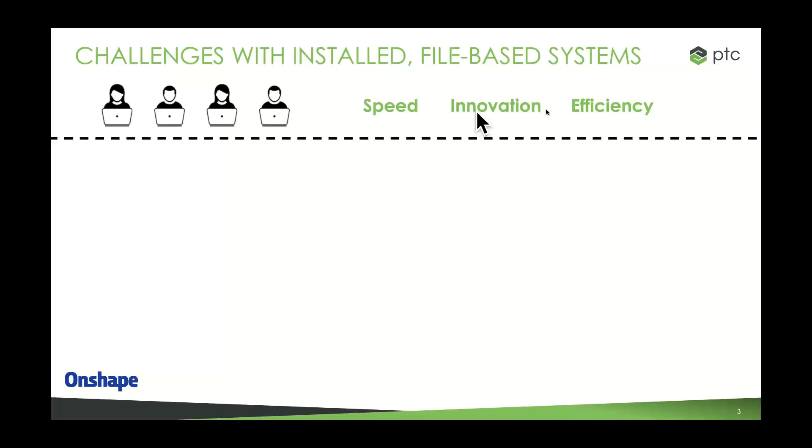But anytime you go below this dashed line that we've drawn here across the screen, that gets in the way of those 3 tenets at the top. So number 1 and 2, which I'll dive into in detail as we go through the presentation, is dealing with this installed software paradigm that we have currently with everything except Onshape. So yeah, you have CAD, PDM, I'll dive into this. Then we have the versions of the CAD that you have to worry about too. 2017, 2020, they're incompatible—you can't go open a 2020 file in 2017. And there's new versions every year. So it gets to be very unmanageable when you're dealing with your extended supply chain.

But the other things that get in the way are the actual files themselves. And this is something that you just wouldn't think about. Every day you go file open, browse for your files, C:\this, X:\that. You might have a PDM that you sign into and you check out a file.

All of these things are not helping you design. Of course, they're organizational things that need to be there for building your designs in a Windows file system usually. And anytime you work with a file, you're creating a file copy essentially.

Now you can work over the network, but that's usually not recommended because the files are big, packets get dropped, things like that. So what people usually do is they take a file, copy it to their desktop, work on it locally. It's faster that way.

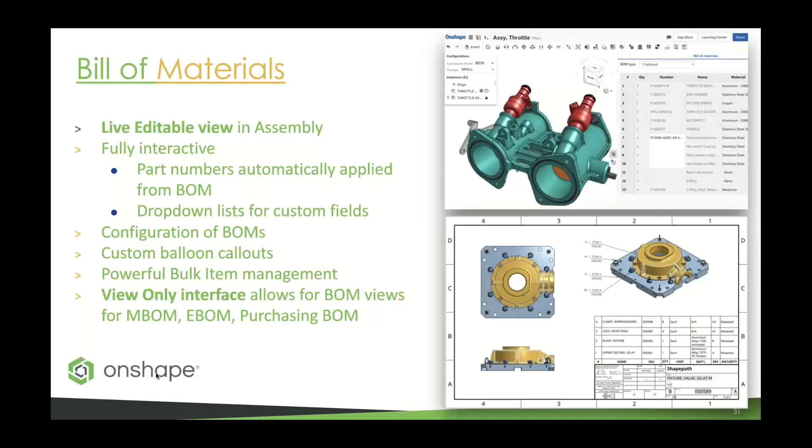But even with a PDM system, you're making file copies. Oh, let me just go back to the previous slide here. Sorry, just hit the wrong button. Slide back. There we are.

So I'll just catch ourselves up here. You have file servers, you have PDM systems that you install. By the way, PDM systems are big file copy machines, essentially. So every time you check out a file to work on it, it takes the file out, copies it. I'll get into detail on that in a few minutes.

I've implemented hundreds of PDM systems over the years. If you saw a photo of me, you've seen I'm quite bald now. I've lost all my hair from pulling it out, dealing with the issues of installed PDM.

People are more and more going to the cloud, right? And cloud drives, Google Drive, Dropbox, OneDrive from Microsoft. But even those are creating file copies between the cloud and your local file system on your computer. You're never working on the cloud, even though you think you are. It's copying a file down to your desktop and trying to synchronize it at a certain polling sequence.

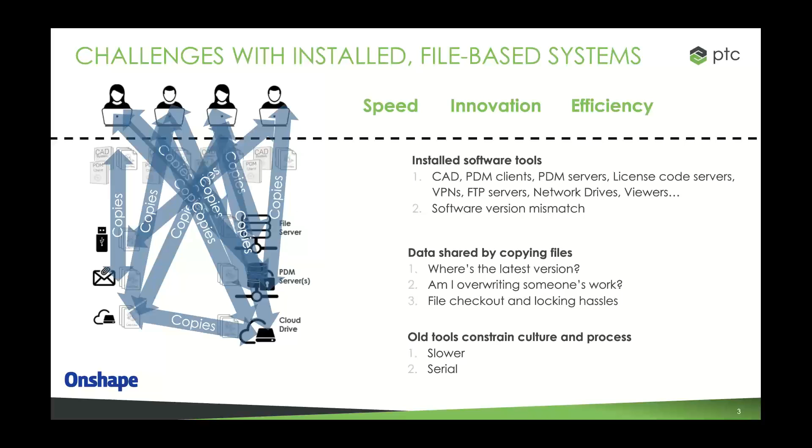So this also gives you two other issues: it's a slow and serial process, and only one person at a time can work. You might ask yourself, well, why would I want to work with more than one person at a time on a design? It's just not possible in a Windows file-based system, or any file-based system for that matter.

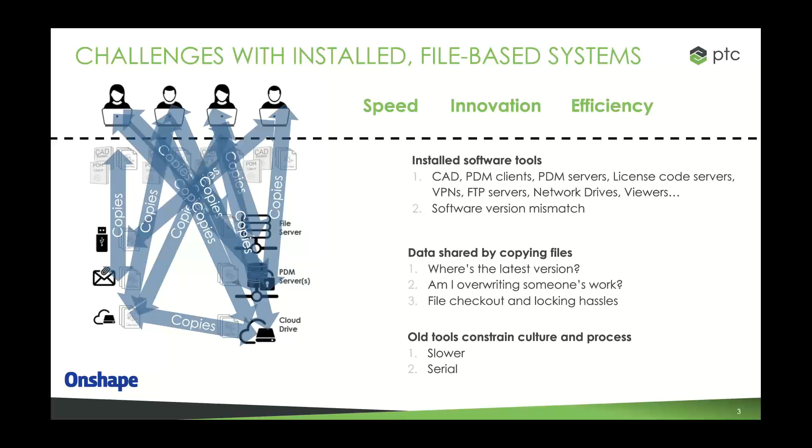So I'll get into what Onshape did to solve this issue. Let's dive into topic number one: installed CAD software. Take a look at what you need to deploy a CAD system at a single organization, like let's just pretend we have Boston and San Francisco for the sake of argument for our design offices.

So this map right here is straight from the help index of a competitive CAD and PDM system. You can see you install CAD workstations, you connect them via your local area network. You have database servers and archive servers that keep the files in the database in order if you're using a PDM system.

And then you need to go over the outside network, over the wide area network, to other offices. So you have maybe San Francisco, maybe even another office in London. All these servers have to synchronize all those files as well, gigabytes and terabytes of files. And you schedule them overnight, maybe they replicate, maybe they don't.

How many times have I gotten calls at midnight saying, where's my files? They haven't been updated or replicated, or it's too slow to go over the wire to replicate things. So all of these things, and there's routers and switches and VPNs, all of these things you have to worry about as a person who's an engineer doing your work.

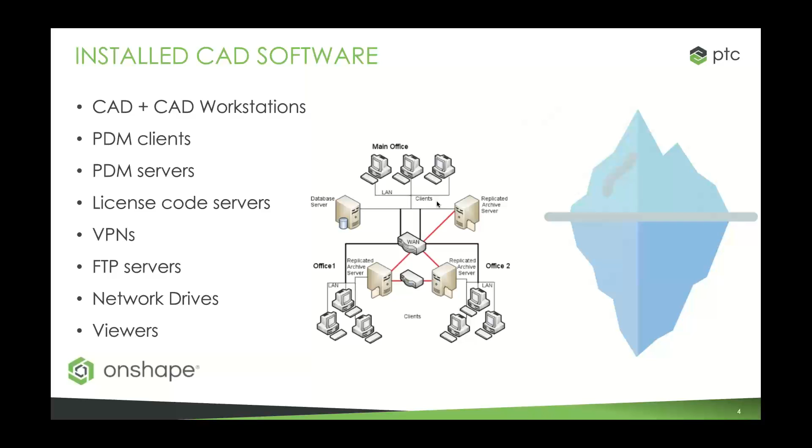Then, to add insult to injury, you have to install the CAD software and keep it up to date on your local machine. So this is a big slowdown, right?

There's version issues too. If you don't install it the proper way, or you need to work with people on different versions of the CAD software, you're not going to communicate very easily. You can't send them the native file, whatever the format of the native CAD system is. So you'll end up sending a step file, a file copy, and then you have a file. But nothing is compatible in the backwards way.

You can't open a 2020 file in 2017. It's just not a thing that you can do. They have these things called AnyCAD, which will allow you to bring in the geometry, but not really make any changes to it. They've put some fancy marketing terms over this issue, but it's really a bad, embarrassing issue for the CAD industry.

This is also true, believe it or not, for CAD viewers. Not only do you have to install a CAD system, you have to install a CAD viewer on your computer as well, and these viewers have the same problem. You can't open an old file or a new file in an older version. And not everybody upgrades at the same time - they choose when they want to upgrade because it's a big, laborsome expense.

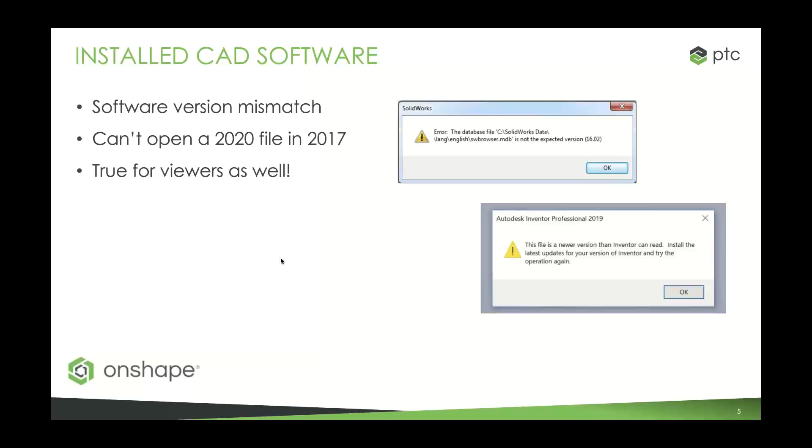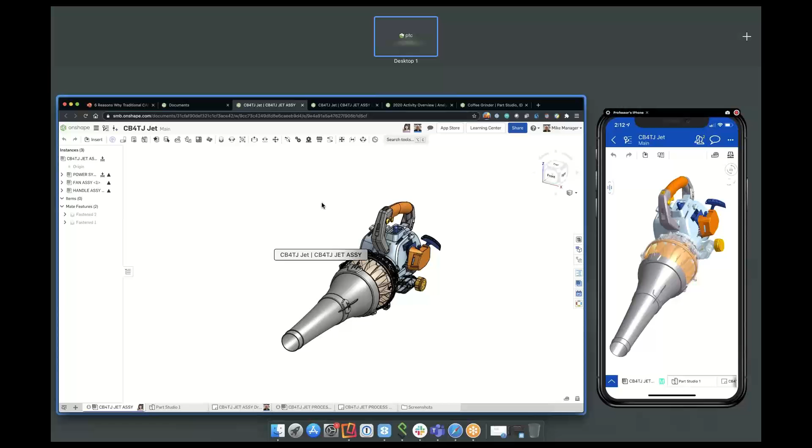Let me just hop in really quickly. Here I am inside of Onshape. I did not have to install anything on my computer. By the way, I'm on a Mac computer - you can see this is just a MacBook. So you can run this on Windows, Mac, Linux. You could probably run it on a toaster with a Raspberry Pi device. You can run this on almost any type of modern computing appliance because it's just running in a web browser. I'm running in a Chrome type web browser right now, and the graphics are being rendered on my local MacBook. I'll get into what that all means in a minute.

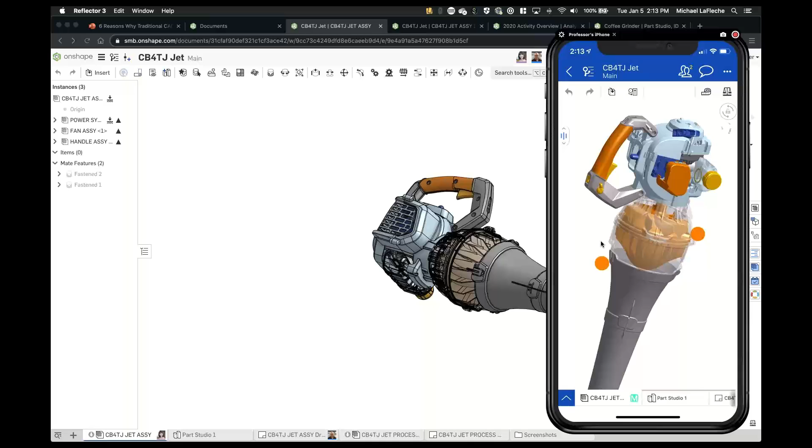This even works on your phone. So this is actually my phone, same model - I have 2 people in the same model at once. You can see the list here: Mike, the manager - if I zoom up here, there's me, there's my bald head. And then there's Debbie, the designer, who's also the person on the phone, essentially. I'll get into a demonstration of this in just a minute.

But everybody in the whole world is on the same version of Onshape, and we roll out version updates every 3 weeks. In fact, there might be an update during this webcast, which would be unbelievable if it happened. But I will not have to shut anything down - everything will just be up to date, and I'll have new features without having to do a single thing. It's really amazing.

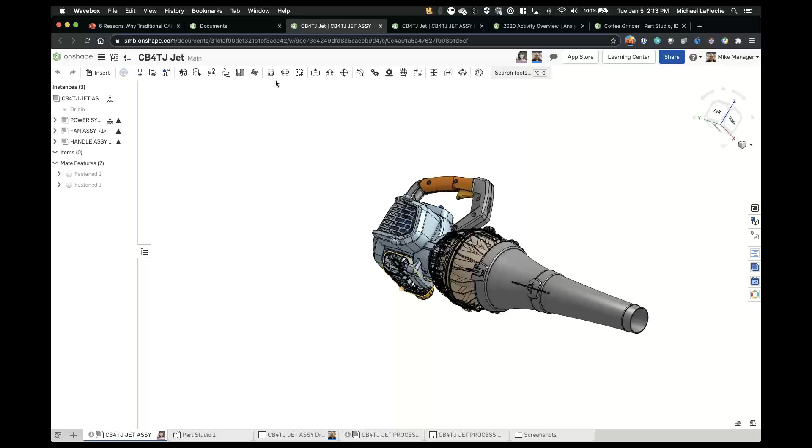This is not right. I don't know any other way of saying it, but you just got to deal with it. People deal with this every day, and they don't understand that there could be a better way. But there wasn't one until Onshape. We'll talk about that as we go through the demonstration.

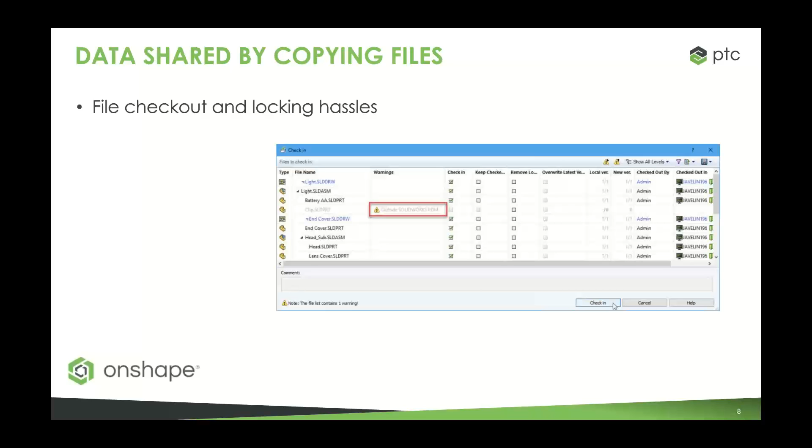Another kind of issue that's out there with some of these install-based CAD systems, and I'm not picking on just one, this is true for almost any software that's installed on your computer. If you don't have everything perfectly set up and just right with the right graphics card and the right drivers and the right antivirus software and the right version of Windows and the right version of SQL and the right version of Office, I could go on, you are going to encounter a crash on your computer. And when you crash, you lose work because it might have been 7 changes since you hit the save button, Control S on your keyboard.

That is really not something that you should tolerate, right? And some people crash more than once a day. Some people might not crash once a week, maybe it's once a month, but it will happen and you will lose work and it will be frustrating and you'll want to pull out your hair.

So we have these issues with install-based software. And why would I bring this up? It's because the architecture of what Onshape is built is fault tolerant. You would never notice if there was a crash, essentially, because we're running everything as parallel services on a very advanced data stack on Amazon Web Services and servers all over the world. So if Parasolid, which is our modeling engine, crashes for whatever reason, can happen, the user would never notice. It's just going to roll over to the next Parasolid engine and continue the operation to perform the extrusion or revolve or whatever you're doing in the CAD system. So we've built the fault tolerant system, and in Onshape, every single change is saved.

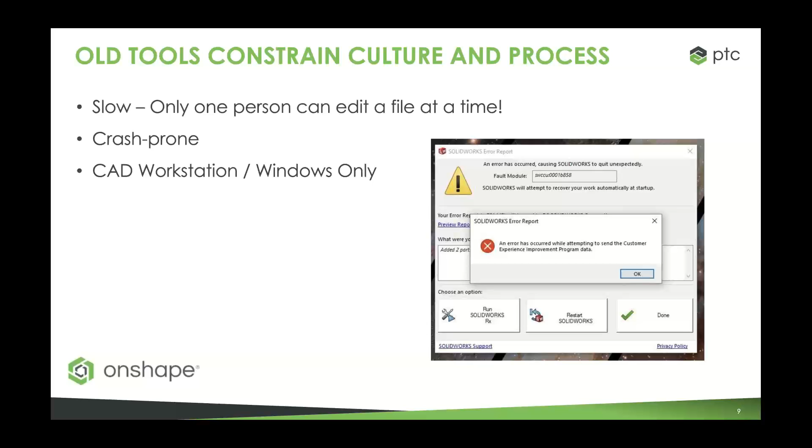They get a drawing, and let's say they want to make a change to a drawing. They go up to the front of the room. They talk to the administrator who's maintaining all the records up at the top of the room. And she would go in and make a copy of the drawing, put the original in the file drawer and give the engineer the copy so they can take their pencil and eraser and make the changes or make new things. And then the engineer would give them the changes, and then the administrator would go in and set a record in a data card somewhere.

It looks like a library card. You have an engineering manager over here chatting away with another person here, and he's the one in charge of doing the design, in charge of the design room and signing the work and things like that. So we had this environment.

And what did we do when we invented CAD many years ago? We just kind of duplicated that process with file servers, databases, and file copies, right? The administrator became a server. Of course, you still have managers and people involved telling it what to do, but that's the filing cabinet is now the server, and then the server is doling out file copies via either file systems or PDM, and everybody's working on their local copies all by themselves, right? And only one person at a time can work on these files.

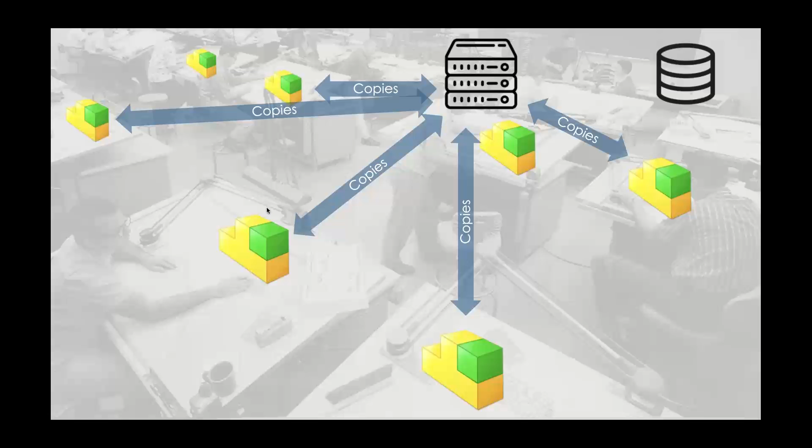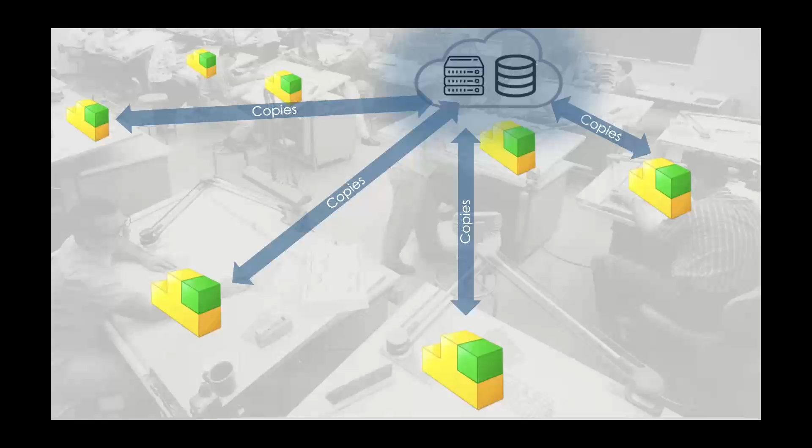Now, people have tried to use the cloud for this, like putting your files in Google Drive, but it's still the same problem. You're just moving the file servers off of your premises, putting the file servers in the cloud, but everybody's still managing files locally, working in isolation.

And we thought that that was just not something that was tenable anymore, especially with, people want to work faster, right? Competitive markets, we have a worldwide market now where we didn't back 20, 30, 40 years ago. We're competing with countries in different areas. Each country competes with another country, of course. I'm not going to pick on any one, but we need to work faster to compete in today's marketplace, to gain market share, right? That's what people do.

And this file-based approach only allows one person at a time to make changes. So Ed, the engineer, makes his changes. Doug, the designer, makes his changes. Emily, the electrical engineer, has to wait until Doug is finished with his changes, right? And the longer you wait to make the changes, the further away it is, where if you find a problem, you have to go back to Ed. You've lost all that time and you have to kind of start and do work over again.

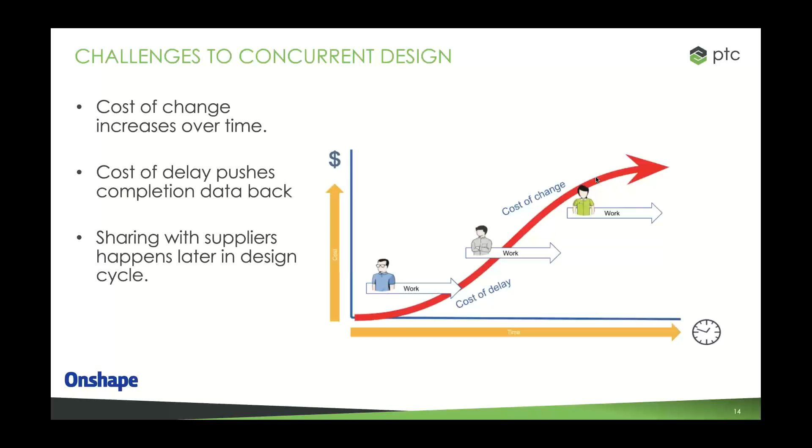This also pushes back when you can start sharing with suppliers. You don't share with your supplier earlier because you don't want to send them something that's wrong, right? But in the world today, we have Agile methodology and processes where you can actually do teamwork now. Onshape has kind of built that in at the core of our system, right?

So, with Onshape, this is what you get. It's not only a CAD system, but it's a data management system. It's a data management system that includes workflow and communication tools. For example, if I click on here, communication tools like you'd see in Google Docs, live comments, follow mode, you can see other people in the document.

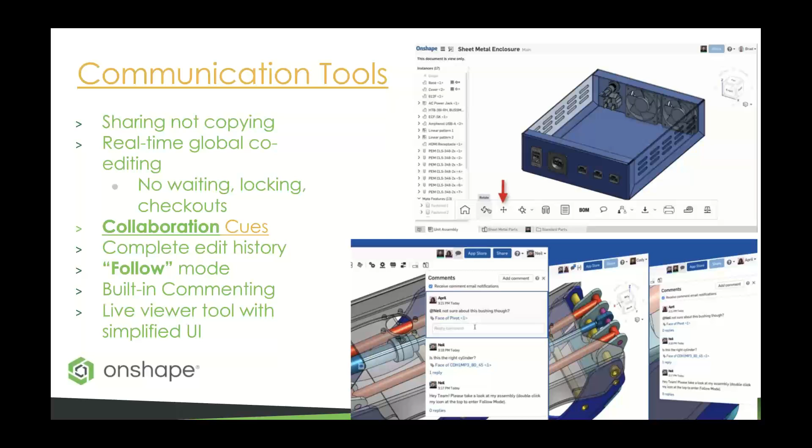So it's much more modern feeling, but also highly collaborative, right? We'll get into all that. The workflow is built into the system.

You have default workflows. We have several flavors of Onshape where you can even customize the workflows to meet your exact corporate needs. And these workflows will work on your iPad, your Mac, your Windows PC, your phone. So you could be on the beach doing approvals or drawing things if you really wanted to.

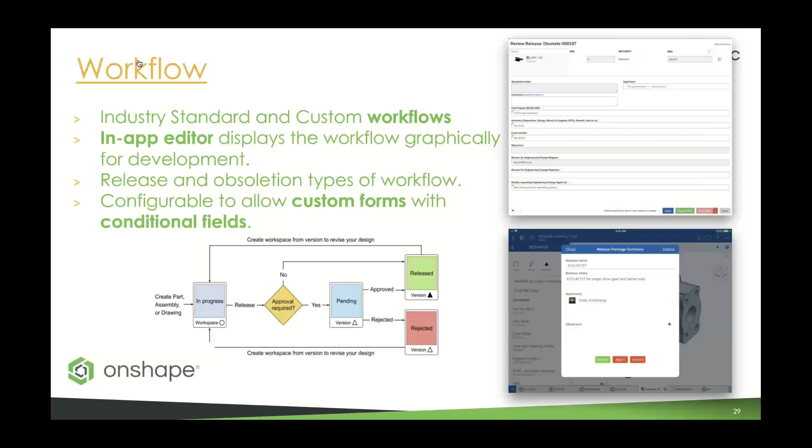All you need is an internet connection, and a small one at that. It doesn't have to be anything fancy. Even your 3 or 4G on your phone will suffice. I'll explain how that works as we go forward here.

We have even task management capabilities here. Assigning work can be done, where that's not typically something you have in a PDM. You usually have to buy an extra system on top of PDM called PLM to do these kind of things. But that's just part of Onshape.

We have apps that work with Onshape as well. We have different companies that have built software that plugs right into Onshape. Maybe I'll show an example of one today, one that just released a new update today. I really like it, so I might show it.

It's really, really interesting, the ability to go in and just sign into a web browser. Here I am, in my web browser doing the slideshow in PowerPoint. I'm not using the installed version. I just have one tab for PowerPoint, and here's my tab for Onshape.

Doesn't matter what browser, as long as it's not Internet Explorer. We just ask you any browser except that. It's not really supported with the new tools out there, but Edge, Firefox, Chrome, Safari all work just fine.

All right, so what I'm going to do is give you a small demonstration here. I might not do this whole thing. I only have really about 20 minutes or so to give a full demonstration, but I like coffee, and I'll build a little coffee grinder here for you, just to give you a flavor of how this thing works.

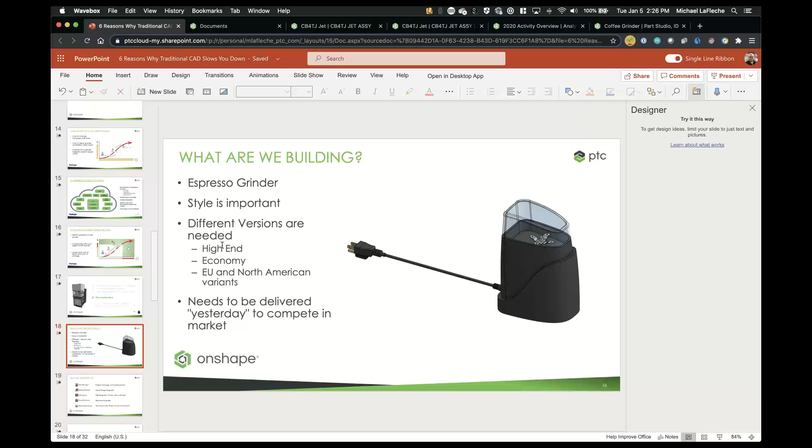We have style components, mechanical components. We need different versions of it, like a high end or an economy version. And we're going to have a design team, some in Boston, some in San Francisco, some in London, maybe have a mold design house that's going to be part of this, to quote on the molding aspect of this. So let's just dive right in.

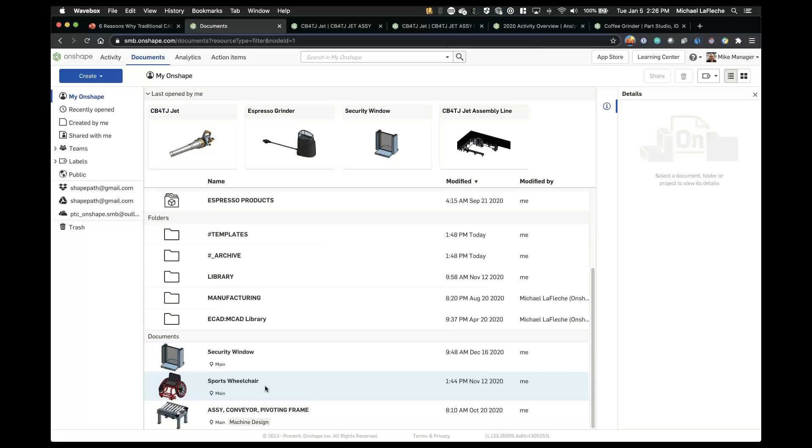Here's Onshape. When you sign in as a named user here, here's Mike, the manager, signing in. And you can see recent documents, projects you're working on, documents. Here's an example of a leaf blower, so we can build very substantial and advanced systems.

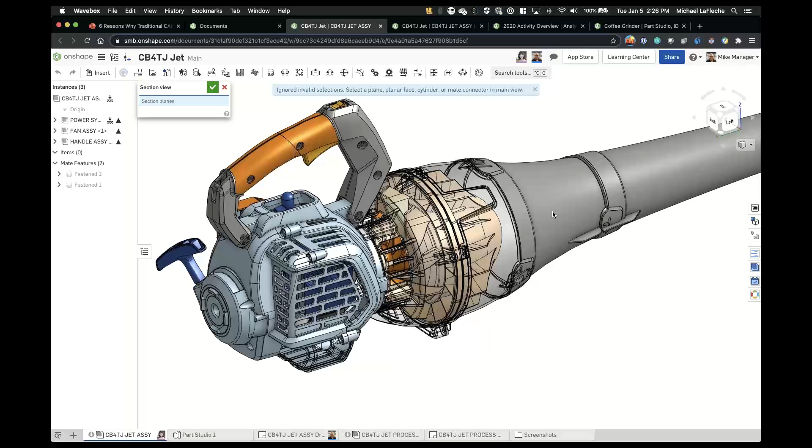We can perform section views very quickly and easily. Here in the system, let me just pick a plane. There we are. So you can see it's got the full engine in here. This engine works—I could start spinning the crankshaft on this thing, and you see the fan moving and all that. It's very easy to go in and work within the system.

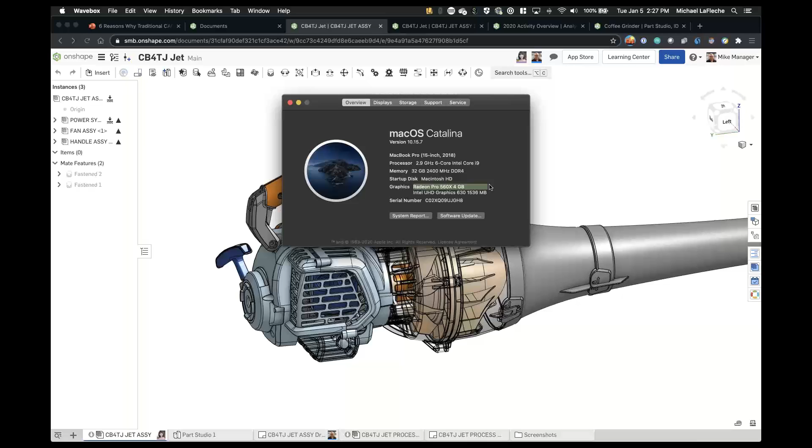I'm just on a MacBook. There's no special graphics card on my computer. I mean, I have a MacBook Pro, which has a Radeon 4GB card, but that's really the only thing that's special on my MacBook here.

You can run this on a Chromebook without a graphics card. The bigger the assembly, the better you might want to have for graphics or something, but that's really the only thing. System requirements are very light—you won't even find a system requirements page on the Onshape website.

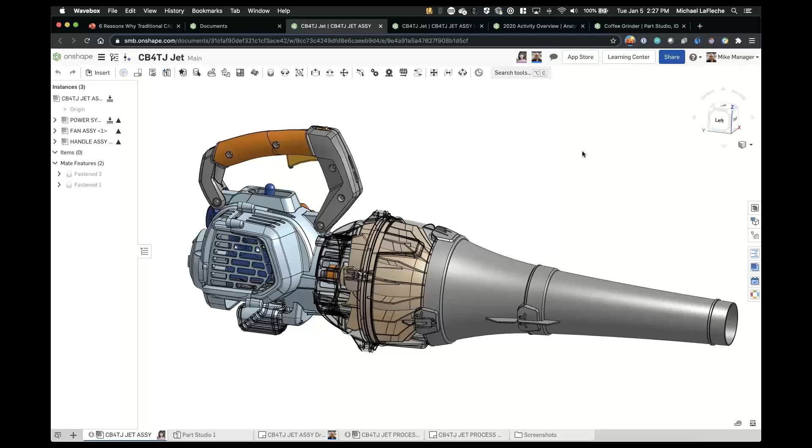So it works really nicely with complicated parts and assemblies. Of course, detailed drawings can be generated with bills of materials and all that as well. This whole time, as we're working in the system in Onshape, you get interesting data analytics from the system as well.

So let's build this coffee grinder. I have a document here loaded up called the coffee grinder. A document in Onshape can have multiple items in it. You can see here the picture of my kitchen counter with the finished coffee grinder, and here's the beginning of the coffee grinder right here.

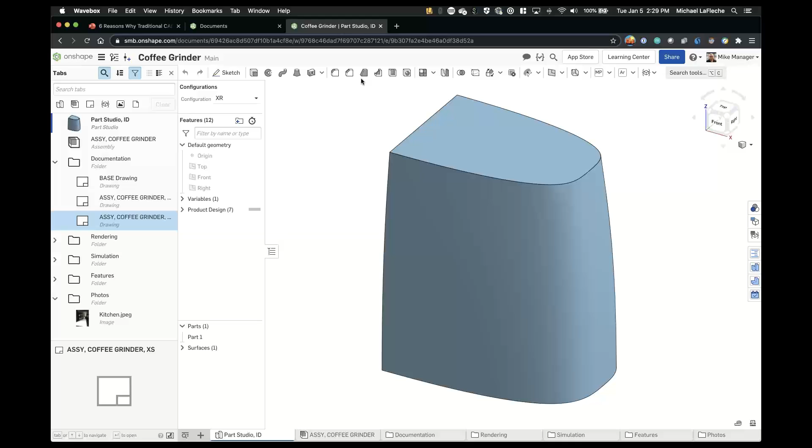So there's a part studio, an assembly, and I might have a folder for some drawings. So a small product can be built in one document. Something like that leaf blower would be built across many different documents that all report up to one another. We teach this all in our training classes available on the website.

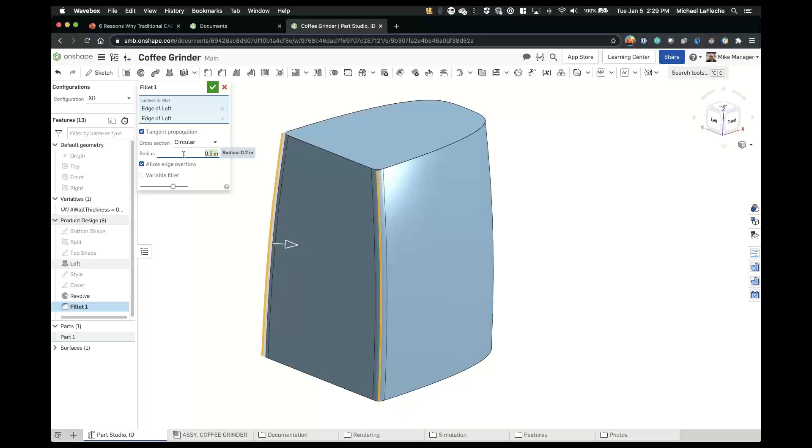So go over here. This should look like a very common parametric feature-based system, except much simpler looking, but it has all the power you'd expect. For example, if I want to throw a fillet radius, I just go in and stick it in there, a 1/2 inch fillet radius, put it on both those fillets. It adds it to the feature tree. Nothing too crazy right there.

But this is where it gets really cool. So what I'm going to do here is make this window a little smaller. And I have Debbie's iPhone here on the screen. This is the live iPhone. I have an app that lets me broadcast it to the screen.

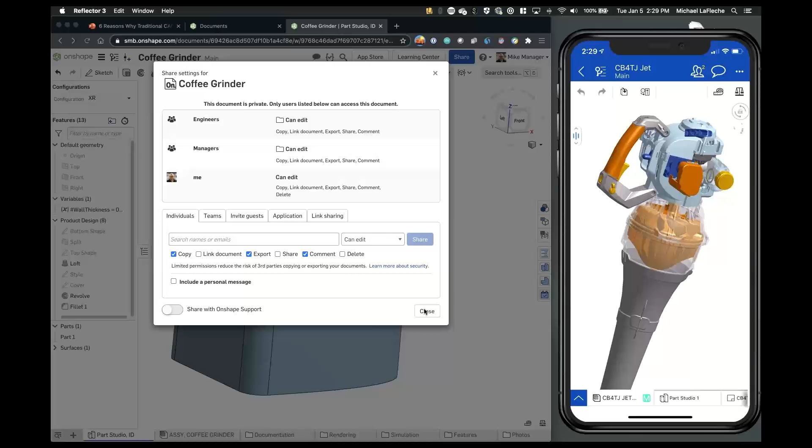I want to share Debbie into this design to help work with it. I'm going to ask her a question. I'm going to add a comment and say, Debbie, can you chat style with me? And I can assign that to Debbie, just like that.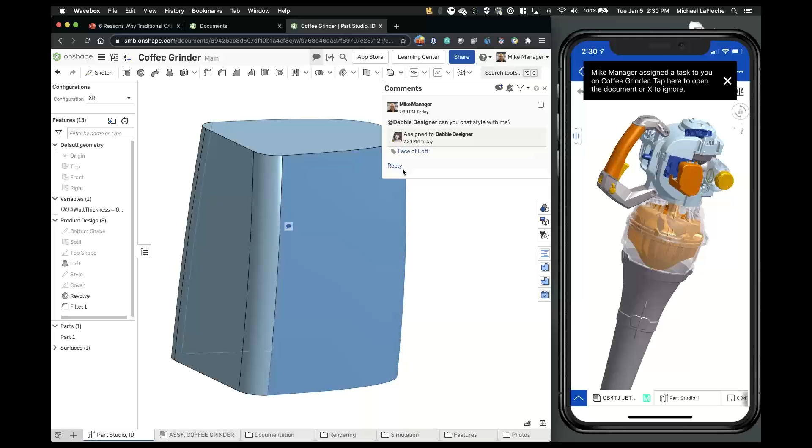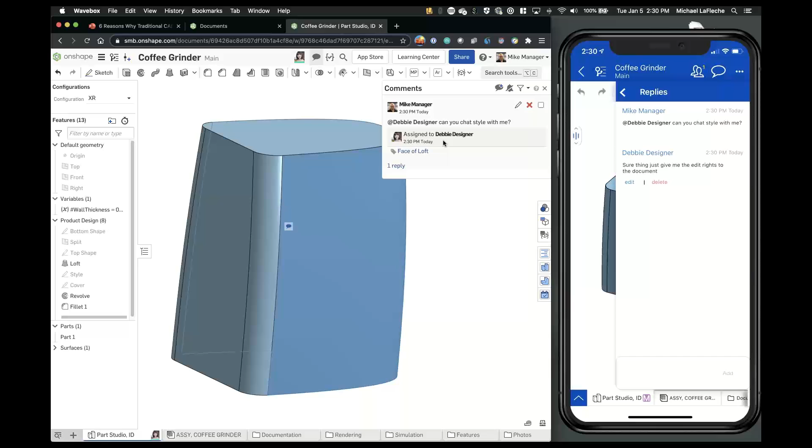And you're going to see a message appear on Debbie's iPhone. There it is. Now you can just go ahead and click that message as Debbie, and there's the comment right there. Debbie is in this design right here with me, and she's going to say, sure thing, just give me the edit rights to the document. Now I'm just showing off because I have the speech-to-text there, but of course that's already here, the reply right there.

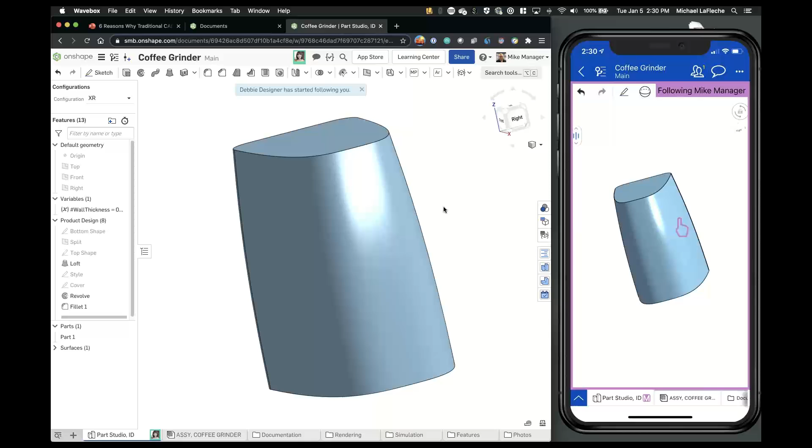We can even do this thing called follow mode. So if Mike wants to show me some things as Debbie, I can have Debbie just click on Mike right here, and anything Mike does on his screen, Debbie is going to see the point of view located here. So great design, collaboration, and communication tools right here.

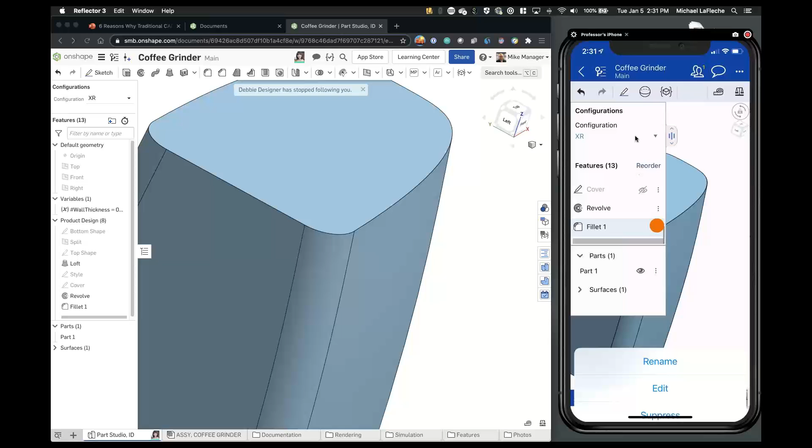As changes are happening, we're going to see them update. Now if I hit the share screen, anybody who is an engineer, I have a team of engineers that Debbie's a member of, can edit this. So she can already edit this, and she can edit this on her phone. She can actually go in and see that feature tree on her phone and make the edit. Maybe she wants that to be 3/4 of an inch, and it's not going to be a standard cross section, it'll be a curvature continuous thing, like Apple's products are all curvature continuous. Debbie just made that change, and Mike sees it in real time.

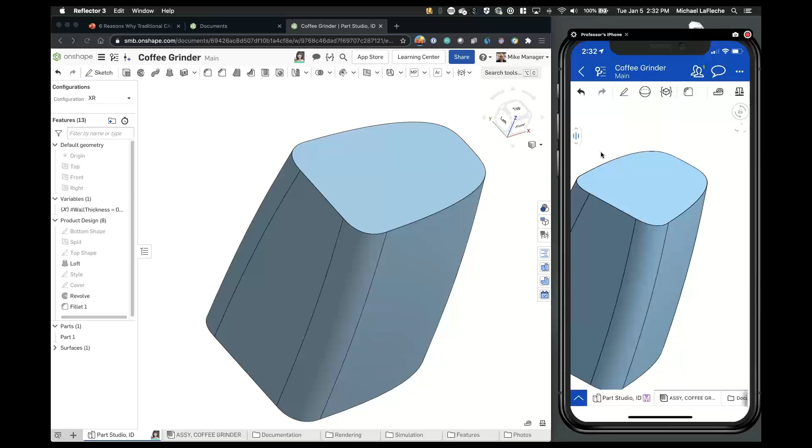So what we've done here is simply remove 5 or 6 different steps from how you would normally do this in a traditional CAD system. You would have to send Debbie the file through some mechanism, whether it be PDM, Dropbox, whatever system you're going to use. You have to take that file, she opens it, she has to have a CAD system installed, she has to open the file. Then you'd have to set up a Teams meeting or a GoToMeeting or something to do a screen share to show what's going on and what you need to do with it. We can just do it right here, and it's all tracked and managed in the system.

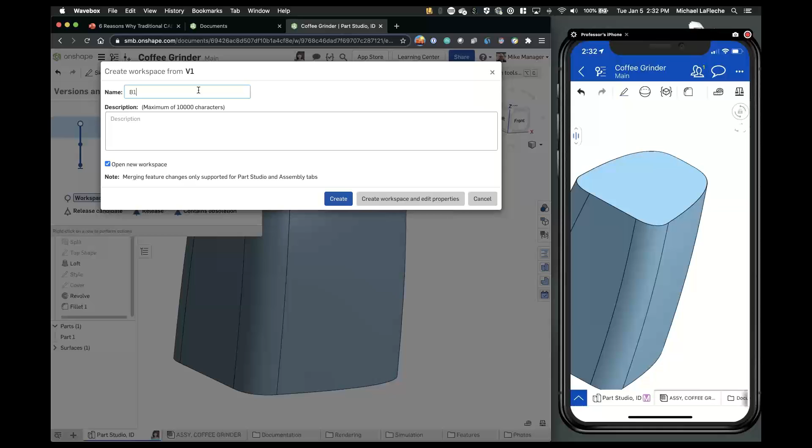Debbie was able to make the change simultaneously, just like in Google Docs, where multiple people can work together in a document. And it has a design history record of everything you're doing here on the side, this version history panel. Mike made this change, Debbie made this change at 2:31 p.m. today. You can label versions in time, like here we are, version 1 in our development process. Very, very easy to do. You can even branch off to try out different designs, different design iterations. So Mike's interested in design for manufacturability, and Debbie is going to be interested in the style.

So we'll just do that. Actually, we'll just do one more branch. I sense a disturbance in the force. I bet we're doing the upgrade right now.

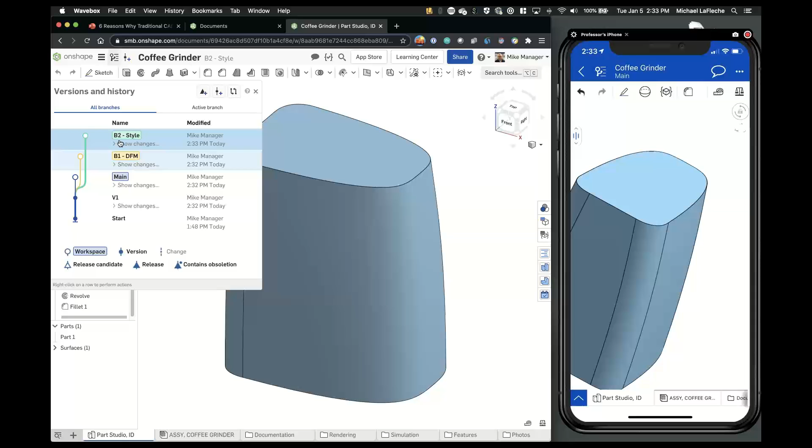All right, so we're going to create a branch for the style. We can work on different branches, just like software developers do all the time nowadays. It's really amazing, they use things like GitHub and branch off their designs. This is an Agile design technique, and we fully support this 100% at a feature-based level.

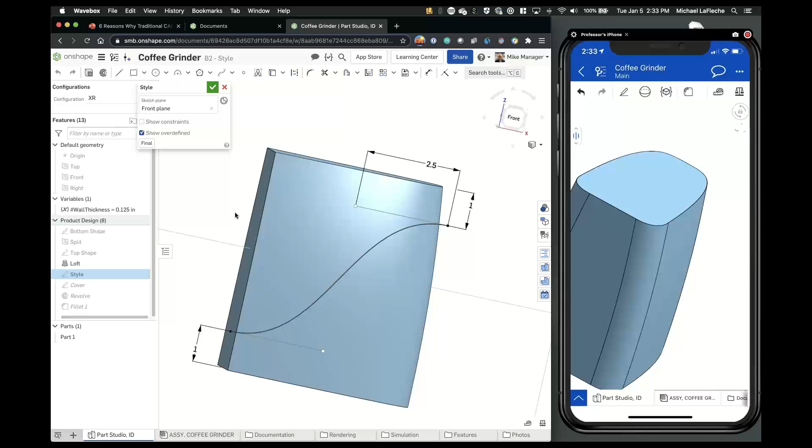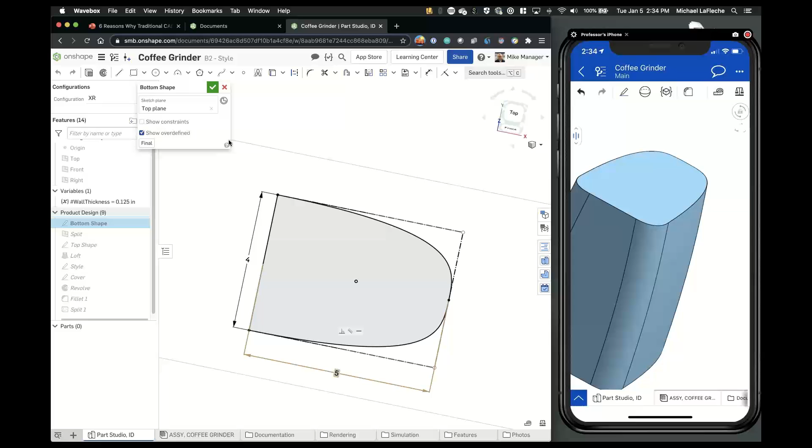So maybe Mike will just take care of the style at this point, just to go really fast here. I have a sketch showing the shape I'm looking to place on the design, and I would go in and create a split using that sketch. This is not a foreign environment, right? This is all basic stuff you'd do in any parametric CAD system, parametric sketches, split faces, maybe you'd even offset these faces on the bottom by some amount based on a variable.

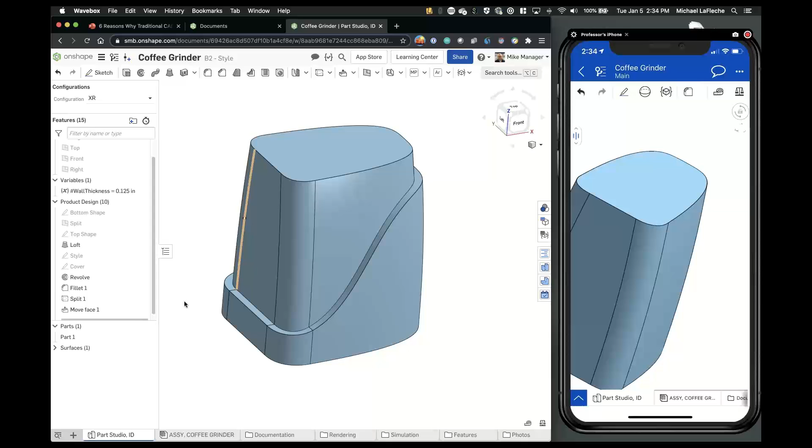I'll say thickness times 2. I have a variable in my tree that I can use, so very quick and easy. We have that here, and we'll even edit this to make it a variable radius fillet, make it even swankier. We'll call that 3/4 of an inch or 3/8 of an inch over here with a smooth transition. So we have this change over here.

Maybe on the phone, I'll go into the design for manufacturability piece right here. I have a surface model I drew earlier, and I'm going to replace one face with another, just like that, and split the part in two now. I'm going to take this part and split it with a plane I had here earlier, and now I have two parts, right? I might just hide the surface to get it out of the way, hit the little eyeball right there.

But it's created two different parts here, which I could rename. This one on top is going to be the cover, and this other one, part one, is going to be the base, right? You would never dream of renaming parts in another CAD system because it would really screw everything up, all the file references would be lost essentially, and you'd have to perform neurosurgery to get it put back together. But there we are, and we have two different branches that we're doing work on.

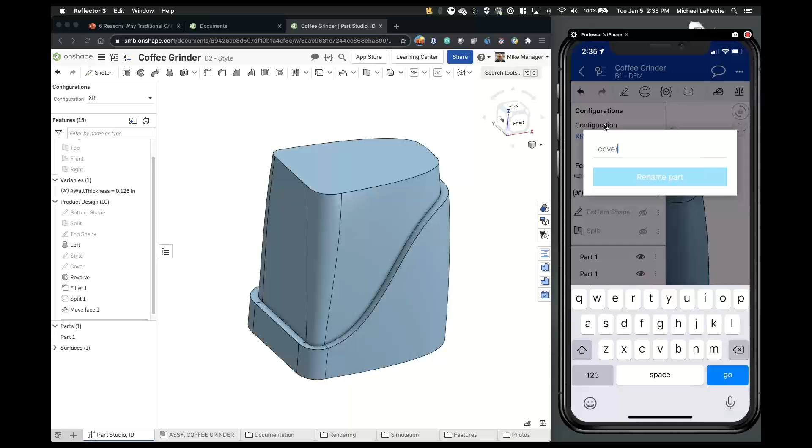That's why we haven't seen the changes update, but we can compare them. I can compare the style against the design for manufacturability, and you'll see a nice comparison report showing the differences between the designs. If you like both of them and want to move forward, you can take all of these great ideas and merge them together. I'll take everything from DFM and everything from style. There it is, now they're both here together, names are correct, features are all in here.

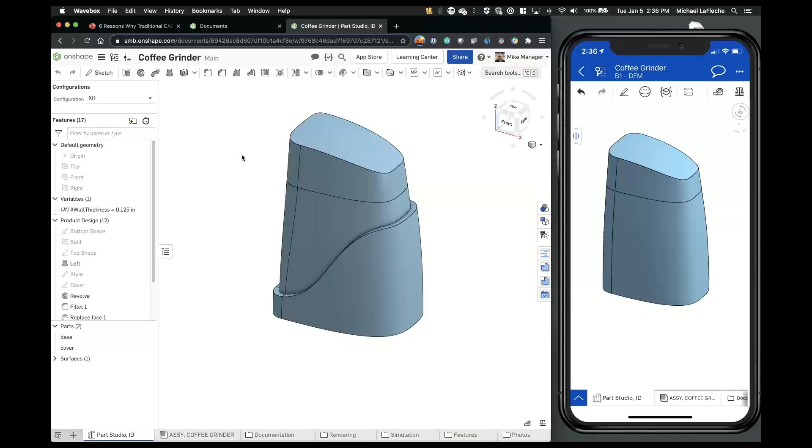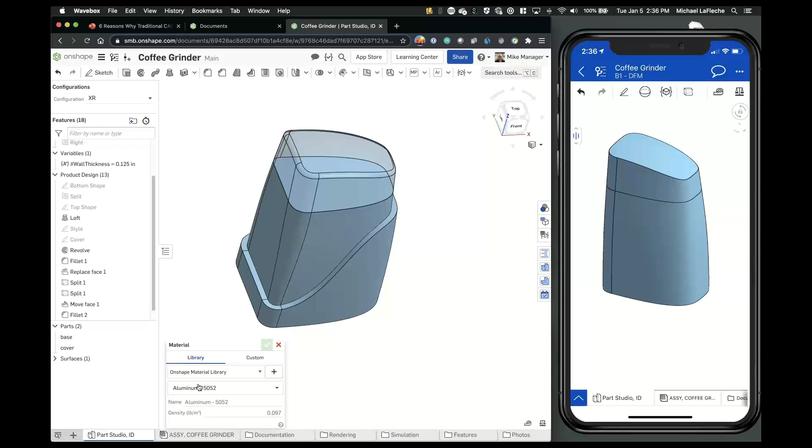You might even go in and finish this off here, just drop in a quick fillet radius on the top, and maybe change the appearance of the cover. You could even set the material, right? So we have a material database, let's set this as some sort of acrylic or something like that. Just do a search, there it is. Because it will actually show us the part masses for each of the items here.

So the base, these are all solid right now, that's why this thing is so heavy, it's a paperweight right now. So I'll just go in and shell out both of the parts together. We'll hide this, shell that out. You can actually shell multiple parts at once.

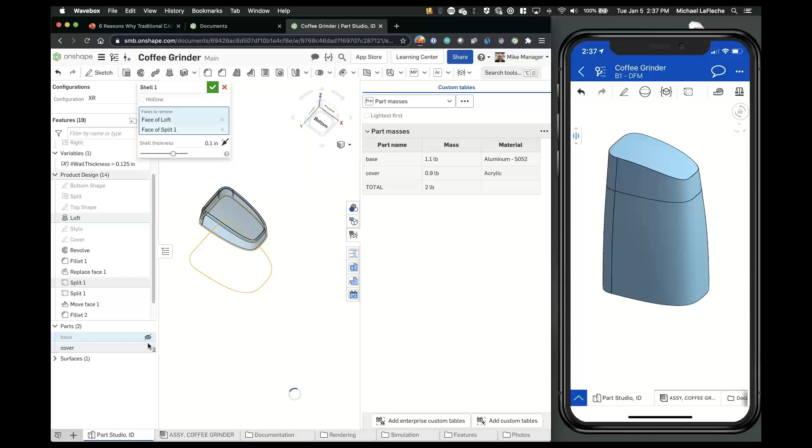So this is what we call a part studio in Onshape. A part studio is really a fast, frictionless way of doing designs. I was able to do in-context design right here. I just saved all that weight right there, 1.1 pounds now, and it's right there, ready to go. I have those two parts designed.

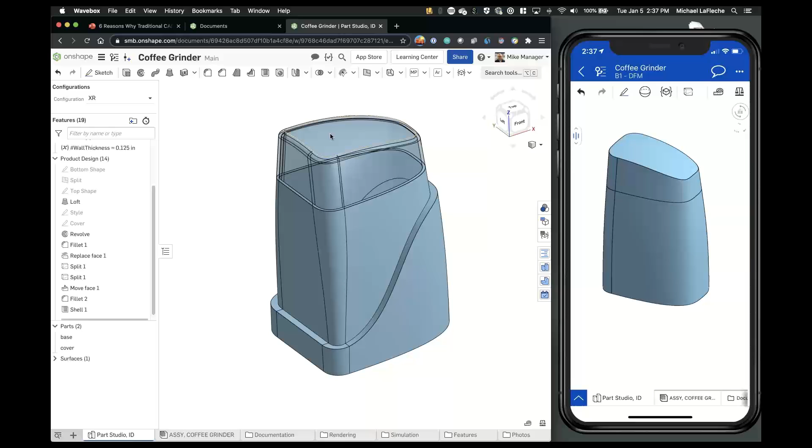And now we need to actually make this real, right? So you probably want to create a detailed drawing of that cover. I might have to slide this out of the way. We're done with the phone for now.

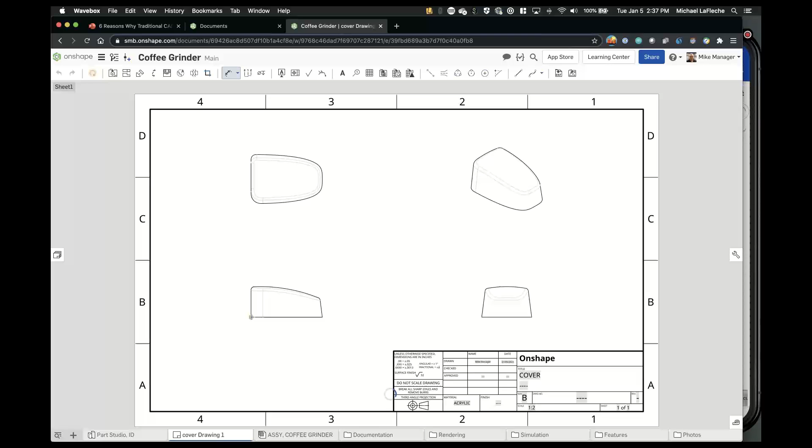So now it's gone ahead and created a drawing. Of course, you can make all your drawings exactly the way you want. I'll just stick a dimension or two on here to make it look real. It's filling out your properties just like that. I even set it to be uppercase for the letters here. And I'm ready to share this for production purposes.

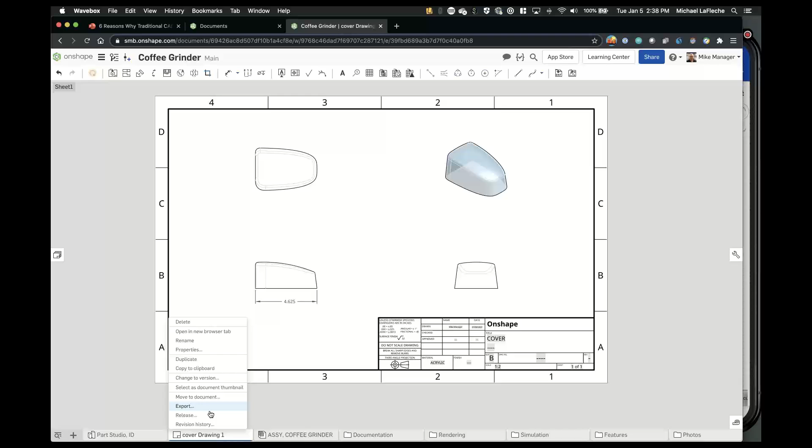I want to release the cover at Rev A. You haven't seen me ever hit a save button, no pop-ups, right? Everything's just continuously saving. So what you can do here at this point is create a special version called a release, which goes through a workflow. You can create all these different types of workflows in the system that do different things, or use a standard one that we provide.

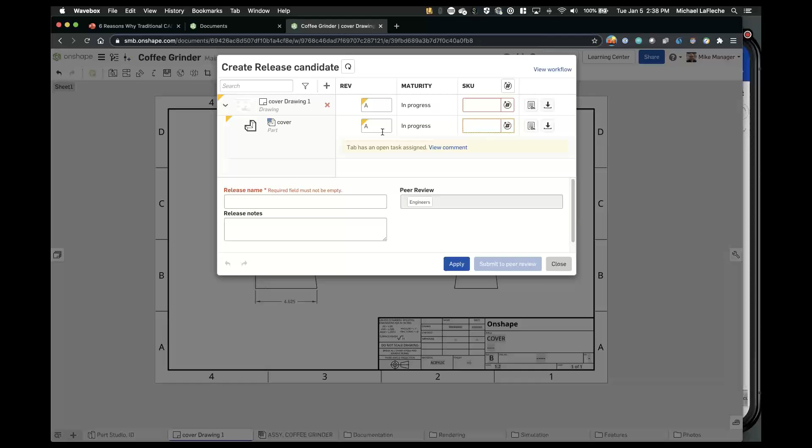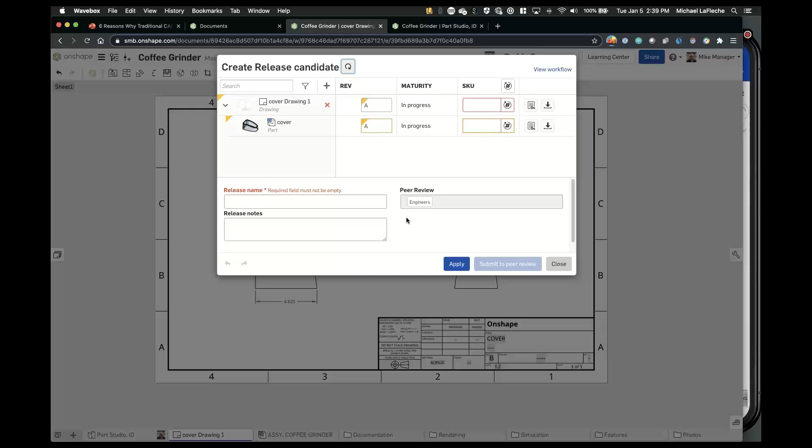This one is a simple two-stage process, which takes the drawing and the part and stamps them at Rev A. It reminds me that there's a task related to that, so I could close out the task before approving it. There's a nice task management system in Onshape that helps you understand which activities are completed and not completed. I'll just hit the refresh button on this, and you'll see the task is now going to be completed in this box, because I don't want to complete my peer review without making sure all the tasks are complete.

You can also have automatic part numbering. So there's the part number automatically generated, serial number, right? I might even just type in the drawing number to match, and I'll give it an engineering change order number.

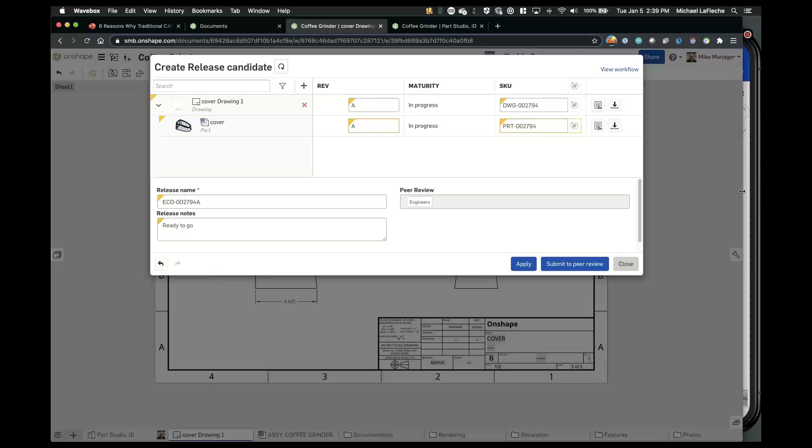Ready to go. And it will be sent out to anybody who's an engineer to sign off on. I'll hit apply, and I'll bring back the phone, because Debbie will have the ability to be part of the peer review process.

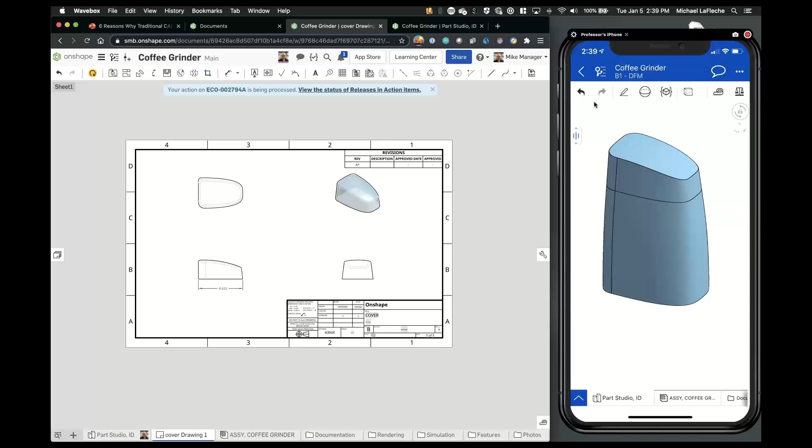I should pick a different drawing template that had a nice rev table on here. But in here, you can see the ECO just pops right up on Debbie's screen, ready to go. She could add comments, she could look at it by going into the details, but I'll just hit the release button. And there it is - see the rev table? Already up to date, I didn't have to do anything. It's just done. Now it's ready to go to Rev A1. That would be the next change that it's fixing to make.

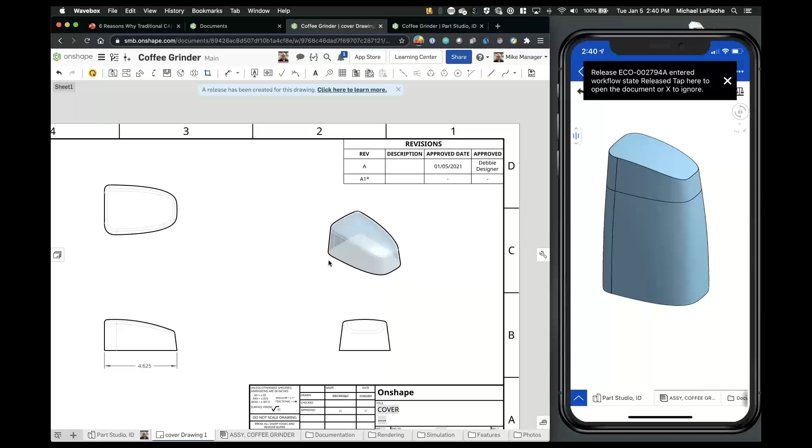And then once you have this, you start building assemblies of parts. So we had the two parts already built right here, so we'll add that to the assembly window. We might add some mates to put this together. So one mate, I'm just going to group these parts together - that's essentially fixing it kind of together.

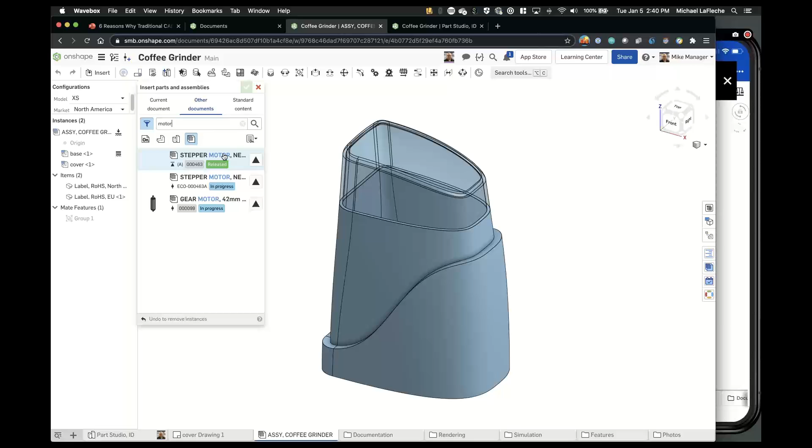I have some other parts that I need to insert from outside of this document. I have a library of motors, right? So I'm going to search for an assembly called motor. Instead of browsing through folder after folder of things, I'm just going to insert Rev A of that motor, just like that, and I drop it on the origin.

I'll just hide the cover here for a second and drop in one more piece. I'm looking for an assembly - actually, let's search for something that has a certain process. I'm searching for parts that are made of sheet metal, right? So I can just do that search just like that, and I forget the name of the part. Of course, I actually do know the name of the part, but I'm just showing you what's possible here. You can do searches in the database for all sorts of things. Actually, I guess I didn't put the sheet metal label on that part, so I'm just going to search for the actual name - it's the blade assembly.

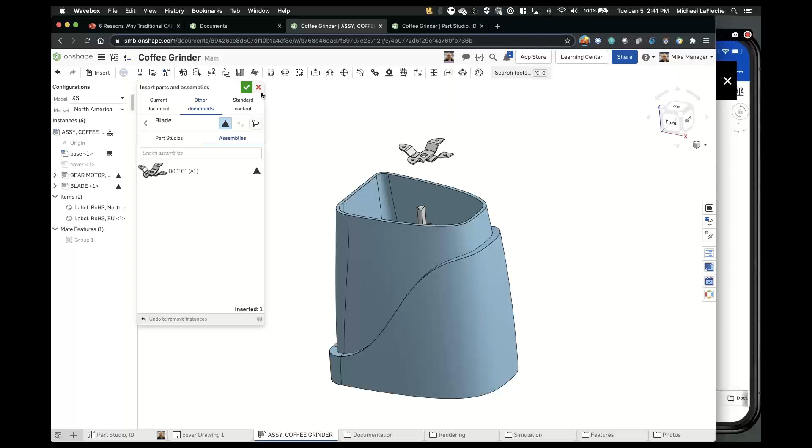And there it is. I'm inserting Rev A of that blade. The way mates work in Onshape, the first time you use it, it's almost a little weird because you're looking for coincident and concentric for your mates. But it's much simpler than that. It's almost too simple at first.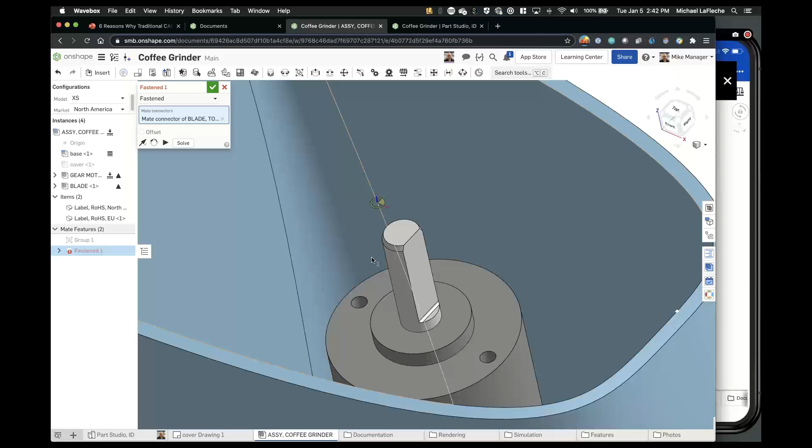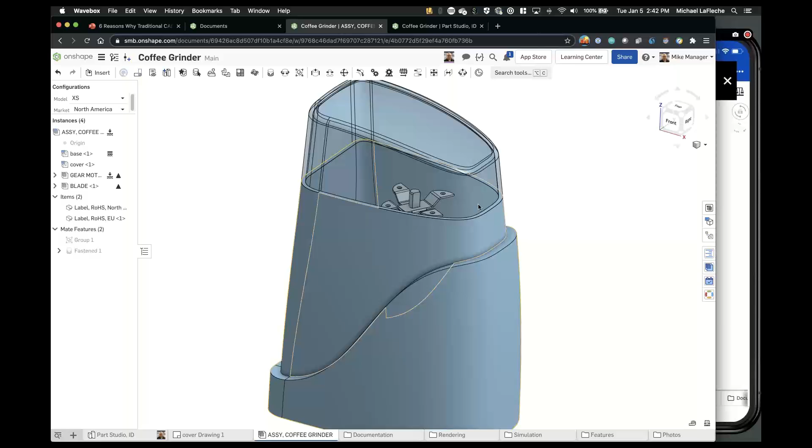I'm going to say I want to move this part from the center of this shape to the middle of that shape. This thing is fully mated now, right? So we have these joint style mates. You can still use mates by one face at a time, but why would you when you have these new methods?

There's many other things we'd have to do to make this go, but before we take our break for questions, the bill of materials is right here. It's showing us the base and the cover. Now I could use the released version of the cover—I could switch to that version, and you'll see what happens in the tree or on the BOM. So now the BOM is showing me I'm using the released version of the cover.

We'll do a structured BOM so we can see all the parts properly: Rev A, Rev C, Rev A1 of the blade. The base is not released yet, so you can mix and match the different release dates, even though I modeled all of it in the same document. Really quite a nice thing.

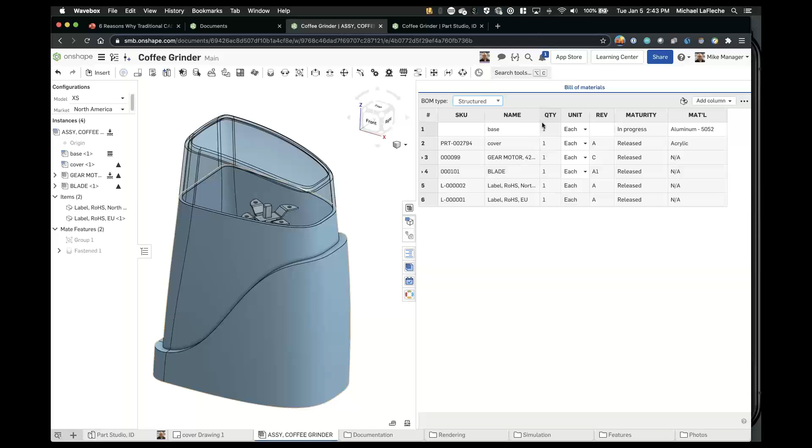Oh, and I just got my wish—the new version of Onshape just deployed while we were in this webinar. So if I go in here, look at this, there's the button right there: what's new in 124? It was 123 when we started the webinar. I couldn't have asked for a better situation, right? I didn't even have to stop and relaunch anything. It's already done, and I can see what's new.

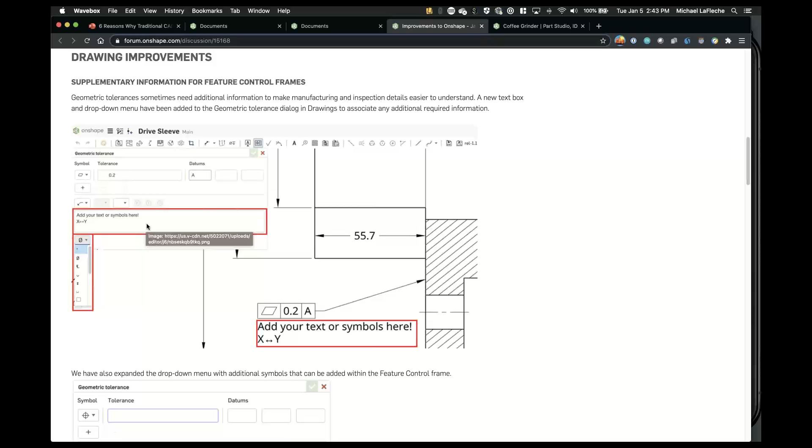Click to learn more, and it will bring you to our forum. And merci beaucoup—we have French language support added to the system in this release. More things you can do in drawings for geometric tolerancing, more enterprise improvements, more dashboards, more improvements to the phone version in iOS.

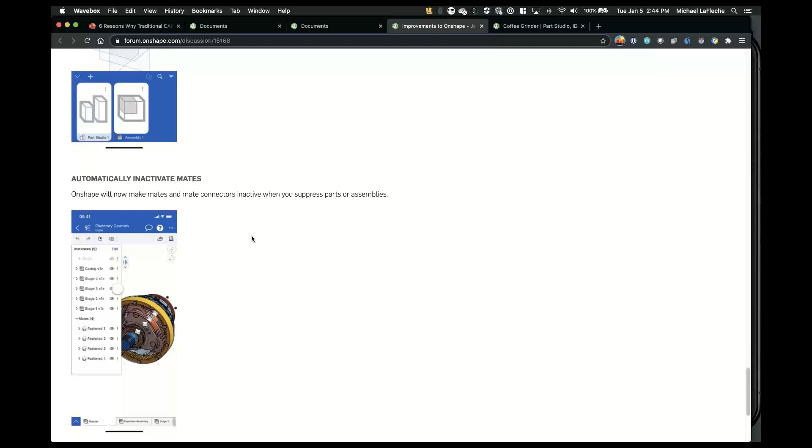So our first update of the year, right after coming back from vacation, we just deployed an update. And this will happen every 3 weeks. So you can always go to what's new in Onshape here. Of course, we had maybe a little bit longer because of the holiday break, but you can see the improvements—these are all the ones in 2020.

We're all working from home, by the way, too. All the developers that work at Onshape, most of them are in the Boston area, but there are people all around the world who work at Onshape, and we're all able to do this from home because we're using a modern technology stack that lets us do this. It's really quite amazing.

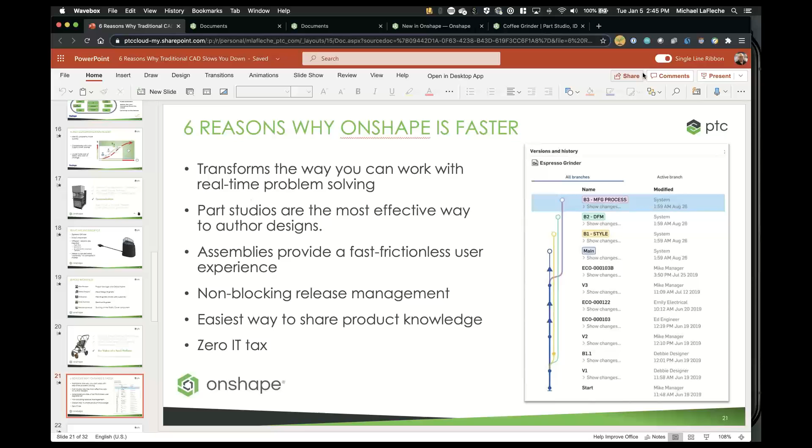So what you saw here was a very basic demonstration, just to give you the thought process in Onshape. Of course, you're going to have lots of questions about how you would implement this at your company. You're not going to be the first ones to do this. There are companies all over the world that have deployed Onshape—well-known names, people who have given us permission to talk about their usage.

These include Formlabs, a well-known 3D printer manufacturer. Companies like Google use Onshape, and they're publicly touting its virtues. You can find stories if you Google it. In aerospace, or automotive I should say, companies that make turbochargers—Garrett Automotive—have a very large deployment of Onshape. So you're not going to be the first ones to dip your toe into this. There are many people around the world using this system.

Because of these 6 reasons, they pick Onshape. You can do real-time work, real-time problem solving. You can work together instead of passing the baton from one person to another. You work in this part studio environment where you can create one or more parts together in the context of each other where appropriate. You wouldn't model an entire Boeing 747 in one part studio, but you might model the flight deck's steering device and the 3 or 4 parts that relate together in one studio. This just makes it way easier to design parts that are related to each other.

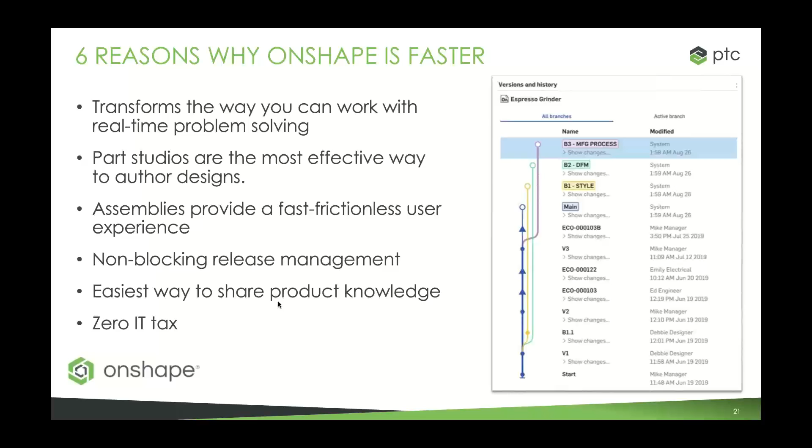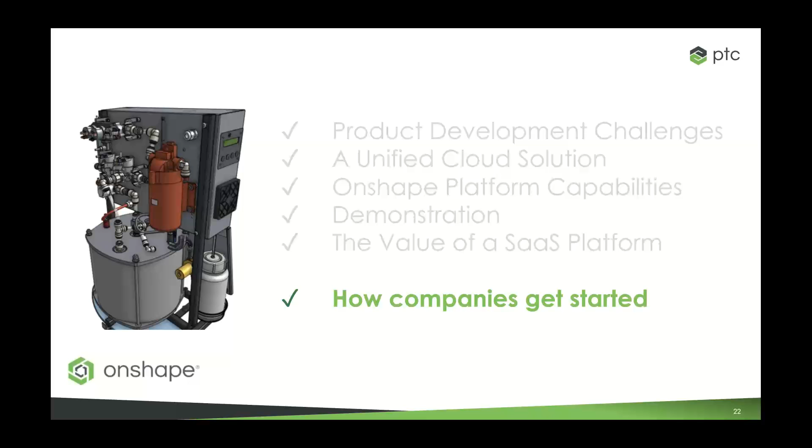So companies typically get started by going to Onshape's website. You can buy it by subscription, single user subscriptions, or you can buy Onshape Professional, which is a company version. So if you have 5 users, you'd buy 5 subscriptions as a company, and you'd all work together as an organization with the same release management system. We even have an enterprise system that goes beyond the capabilities of Professional, with dashboards and analytics, customizable workflows, and other nice things. So it's really easy to get started with Onshape.

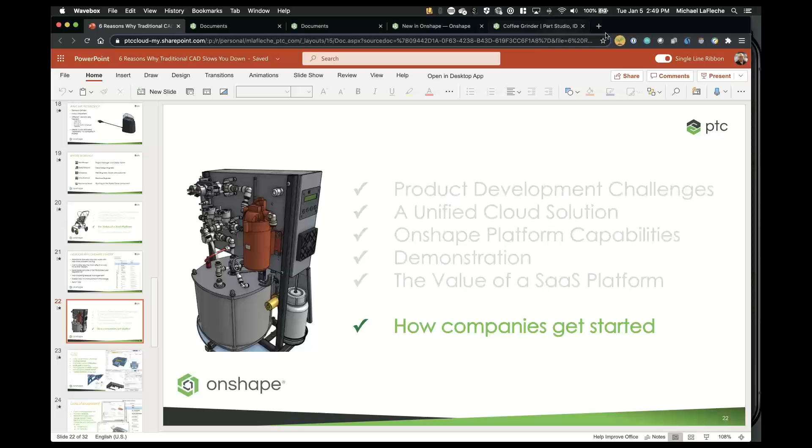Well, first of all, we're an online store, but we always have support. On every page of our website, there's a phone number. Call the phone number and you'll be directed to our salesperson, people who are very knowledgeable and can get you all the information you need. Every page has a phone number right on top, next to Novedge. You can really reach out anytime, and that's what makes the difference. The website is very easy and intuitive, but sometimes you need to talk to somebody, and we're there for you.

So if people have questions, just email or call in, and they'll get the answer.

Times for SolidWorks are gone. I'll leave it at that because I didn't say that, but it's an honest comment from an attendee.